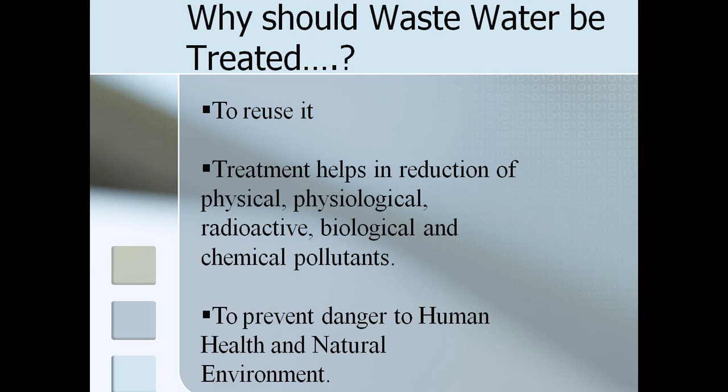The principal objective of wastewater treatment is generally to allow human and industrial effluents to be disposed of without danger to human health or unacceptable damage to the natural environment. Treatment is also necessary because it helps in the reduction of physical, physiological, radioactive, biological, and chemical pollutants. This table shows the typical wastewater flow rates from various sources.

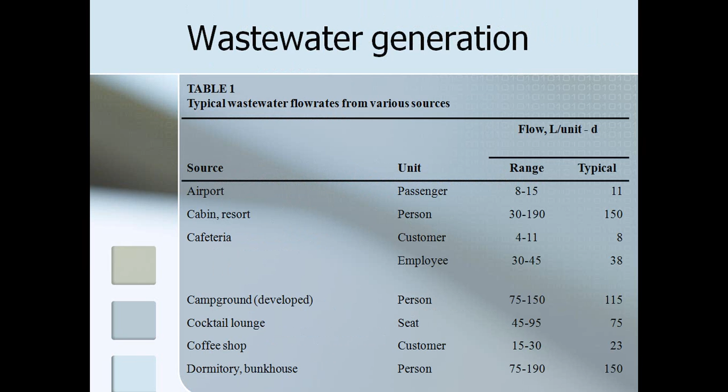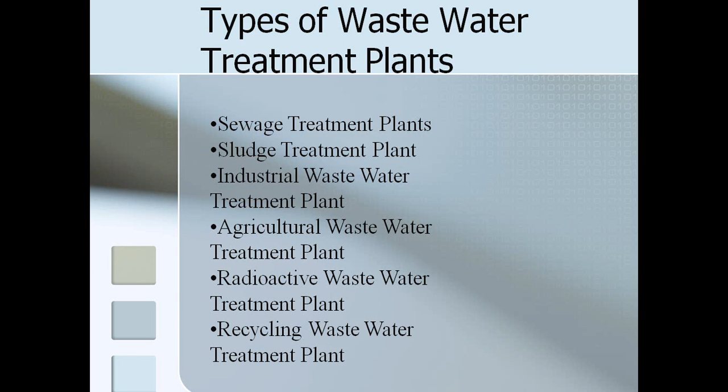Now we come to the types of wastewater treatment plants, which includes sewage treatment plants, sludge treatment plants, industrial wastewater treatment, agriculture wastewater treatment plant, radioactive wastewater treatment plant, recycling wastewater treatment plant, and plenty of more.

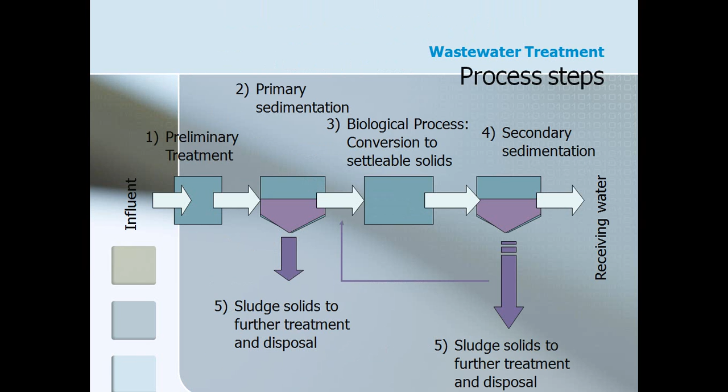This is the process diagram of the basic steps of the wastewater treatment. Now we come to them one by one. First of all, we discuss preliminary treatment. The objective of preliminary treatment is the removal of coarse solids and other large materials often found in raw wastewater. Removal of these materials is necessary to enhance the operation and maintenance of subsequent treatment units. Preliminary treatment operations typically include coarse screening, grit removal, and in some cases comminution of large objects.

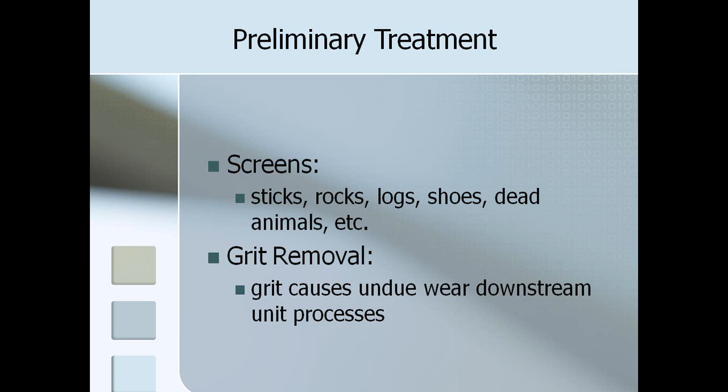In grit chambers, the velocity of the water through the chamber is maintained sufficiently high or air is used, so as to prevent the settling of most organic solids. Grit removal is not included as a preliminary treatment step in most small wastewater treatment plants. Comminutors are sometimes adopted to supplement coarse screening and serve to reduce the size of large particles so that they will be removed in the form of sludge in subsequent treatment processes. Flow measurement devices, often standing wave flumes, are always included at the preliminary treatment stage. This diagram shows the preliminary treatment and the process is grit removal.

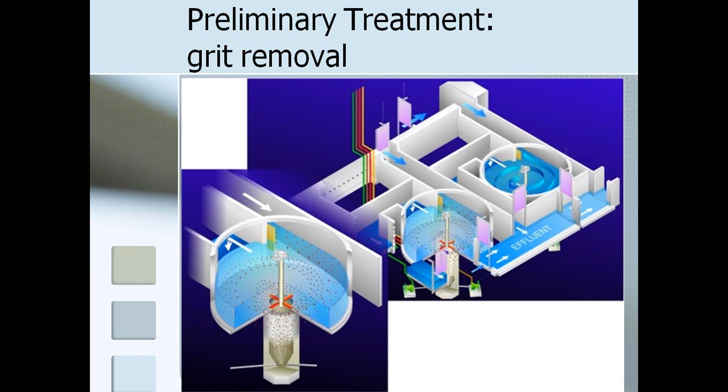Now we come to the biological process, which is the conversion to settleable solids. In large sewage treatment plants, primary sludge is most commonly processed biologically by anaerobic digestion. In the digestion process, anaerobic and facultative bacteria metabolize the organic material in sludge, thereby reducing the volume requiring ultimate disposal, making the sludge stable, and improving its dewatering characteristics. Digestion is carried out in covered tanks, typically 7 to 14 meters deep.

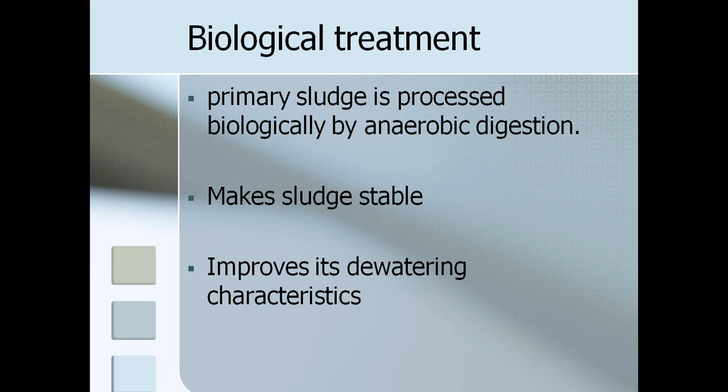The residence time in a digester may vary from a minimum of about 10 days for high-rate digesters to 60 days or more in standard-rate digesters. Gas containing about 60 to 65% methane is produced during digestion and can be recovered as an energy source. In small sewage treatment plants, sludge is processed in a variety of ways including aerobic digestion, storage in sludge lagoons, direct application to sludge drying beds, in-process storage, and land application.

The second step, ladies and gentlemen, is primary treatment. The objective of primary treatment is the removal of settleable organic and inorganic solids by sedimentation and the removal of materials that will float by skimming. Approximately 25 to 50% of the incoming biochemical oxygen demand, 50 to 70% of total suspended solids, and 65% of the oil and grease are removed during primary treatment.

Some organic nitrogen, organic phosphorus, and heavy metals associated with solids are also removed during primary sedimentation, but colloidal and dissolved constituents are not affected. The effluent from primary sedimentation units is referred to as primary effluent. In many industrialized countries, primary treatment is the minimum level of pre-application treatment required for wastewater irrigation. It may be considered sufficient treatment if the wastewater is used to irrigate crops that are not consumed by humans or to irrigate orchards, vineyards, and some processed food crops.

However, to prevent potential nuisance conditions in storage or flow equalizing reservoirs, some form of secondary treatment is normally required in these countries, even in the case of non-food crop irrigation. It may be possible to use at least a portion of primary effluent for irrigation if offline storage is provided. Primary sedimentation tanks or clarifiers may be round or rectangular basins, typically 3 to 5 meters deep, with hydraulic retention time between 2 and 3 hours.

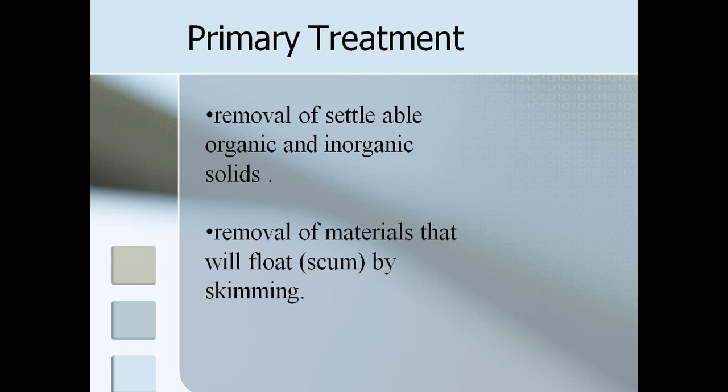Now we come to the next step, which is secondary treatment. The objective of secondary treatment is the further treatment of the effluent from primary treatment to remove the residual organics and suspended solids. In most cases, secondary treatment follows primary treatment and involves the removal of biodegradable, dissolved, and colloidal organic matter using aerobic biological treatment processes.

Aerobic biological treatment is performed in the presence of oxygen by aerobic microorganisms, principally bacteria, that metabolize the organic matter in the wastewater, thereby producing more microorganisms and inorganic end products. Several aerobic biological processes are used for secondary treatment, differing primarily in the manner in which oxygen is supplied to the microorganisms and in the rate at which organisms metabolize the organic matter.

High-rate biological processes are characterized by relatively small reactor volumes and high concentrations of microorganisms compared with low-rate processes. Consequently, the growth rate of new organisms is much greater in high-rate systems because of the well-controlled environment. The microorganisms must be separated from the treated wastewater by sedimentation to produce the clarified secondary effluent.

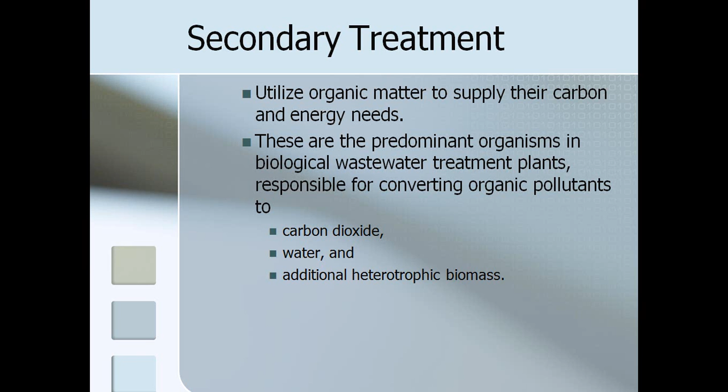The sedimentation tanks used in secondary treatment, often referred to as secondary clarifiers, operate in the same basic manner as the primary clarifier described previously. The biological solids removed during secondary sedimentation, called the secondary or biological sludge, are normally combined with primary sludge for sludge processing. The final step is the sludge solids to further treatment and disposal.

Common high-rate processes include the activated sludge processes, trickling filters or biofilters, oxidation ditches, and rotating biological contactors. The combination of two of these processes in series is sometimes used to treat municipal wastewater containing high concentration of organic material from industrial sources. High-rate biological treatment processes in combination with primary sedimentation typically remove 85% of the biological oxygen demand originally present in the raw wastewater and some of the heavy metals.

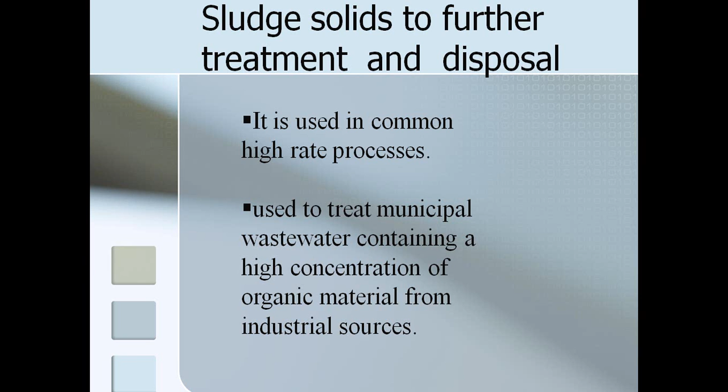Activated sludge generally produces an effluent of slightly higher quality in terms of these constituents than biofilters or RBCs. When coupled with a disinfection step, these processes can provide substantial but not complete removal of bacteria and virus. However, they remove very little phosphorus, nitrogen, non-biodegradable organics, or dissolved minerals. Although secondary treatment can remove over 85% of biological oxygen demand, suspended solids, and nearly all pathogens, sometimes additional treatment is required.

Some processes used in advanced wastewater treatment include filtration, carbon adsorption, phosphorus removal, and nitrogen removal. Now we discuss them one by one. First we come to filtration. Sand filters similar to those used for producing drinking water are sometimes used for additional removal of microorganisms and other solids. However, unlike water treatment sand filters, the filters used in wastewater treatment often use large, lightweight aggregates at the top to improve efficiency and facilitate cleaning.

Now we come to carbon adsorption. The most practical way to remove refractory organics is by adsorbing them on activated carbon. Adsorption, not to be confused with absorption, is the accumulation of materials on an interface. Carbon is activated by heating it in the absence of oxygen. This activation process creates many small pores in each carbon particle. Activation thus increases the surface area of each carbon particle, making it more effective as an adsorption agent.

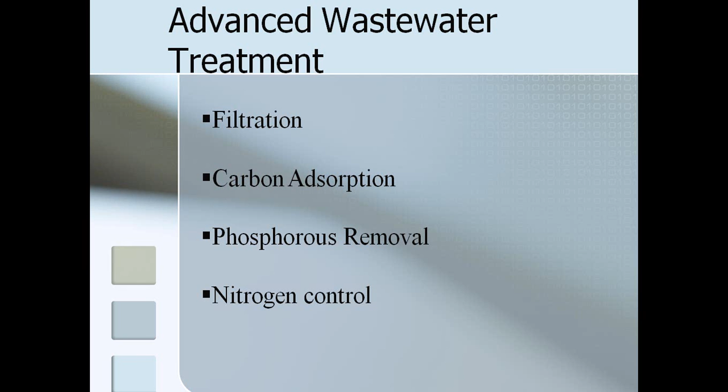Now the last is nitrogen control. Nitrogen in any soluble form is a plant nutrient and may need to be removed from the wastewater to control the growth of algae. In addition, nitrogen in the form of ammonia exerts an oxygen demand and can be toxic to fish. Nitrogen can be removed from the wastewater by both biological and chemical means. The biological process is called nitrification or denitrification, and the chemical process is called ammonia stripping.

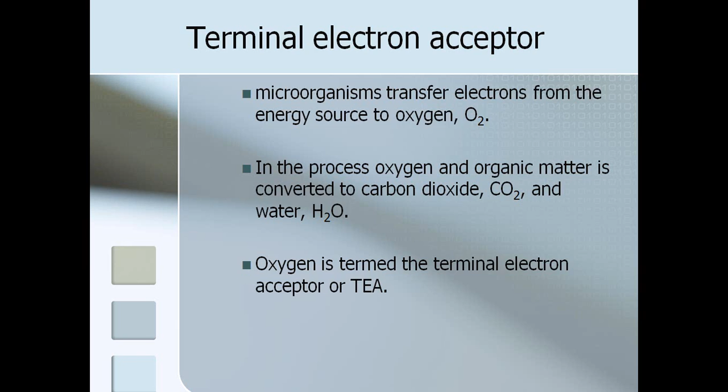In wastewater treatment, a term usually arises, namely terminal electron acceptor. We know that microorganisms transfer electrons from the energy source to oxygen. In the process, oxygen and organic matter are converted to carbon dioxide and water. The oxygen is termed the terminal electron acceptor. Microorganisms utilize some other oxidized compounds to accept electrons. In the case of denitrifying microorganisms, nitrate serves as the terminal electron acceptor, as nitrate is converted to nitrogen gas.